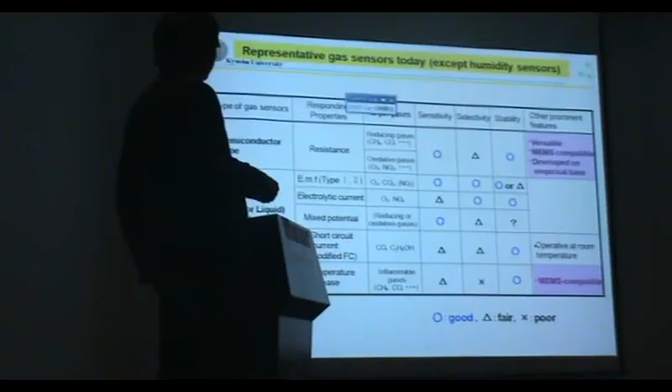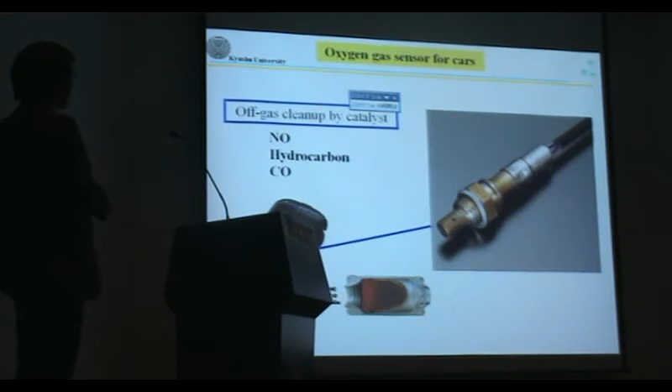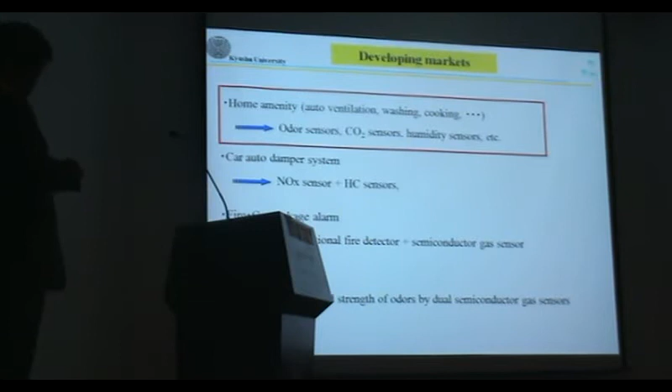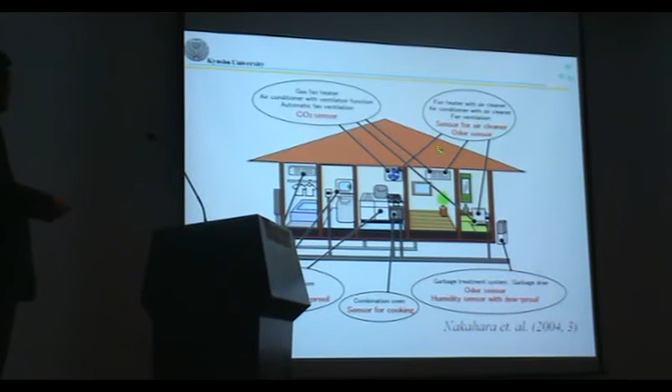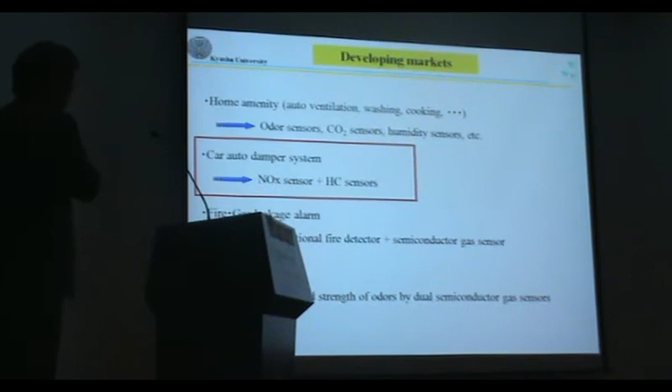So now we can find many gas sensors in the house: CO2 gas sensor, humidity sensor, and other kinds of gas sensor, odor sensor, and dew point sensor. Okay. And in the recent 10 years, European companies use a special kind of sensor. It was the auto damper system sensor.

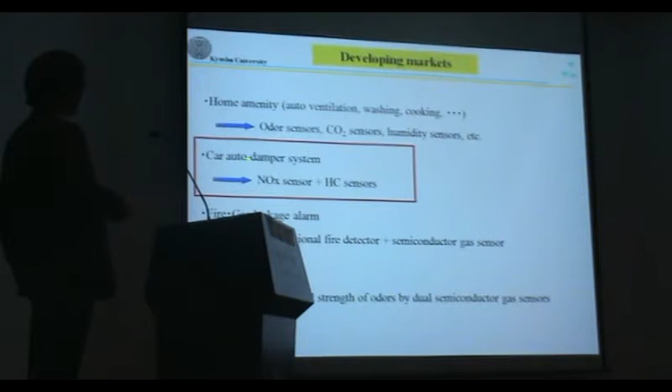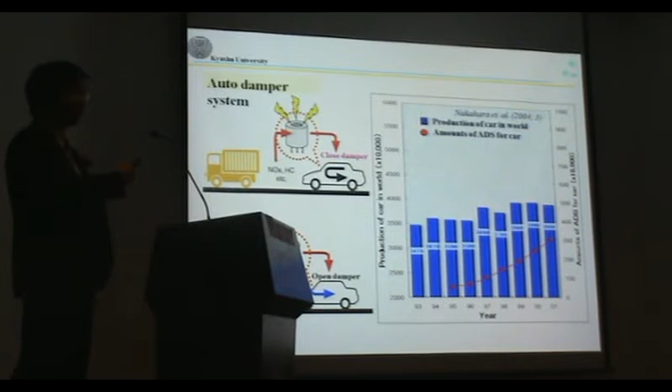So maybe Asian countries didn't use this kind of sensor, because our cars include the air conditioner system, but in Europe, the outside is very clean compared with the Asian areas. So they want to introduce fresh air from outside. This sensor is very useful to control the temperature. That's the condition controlled by this sensor.

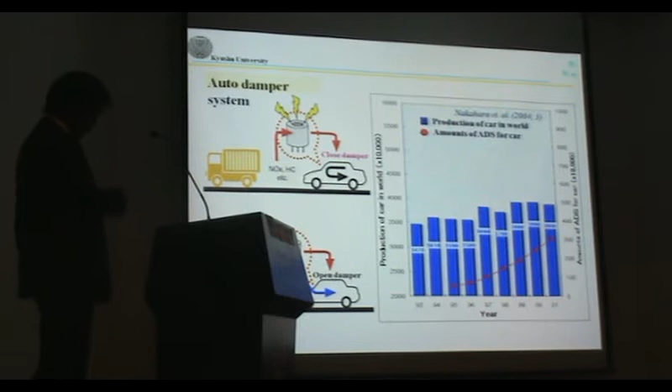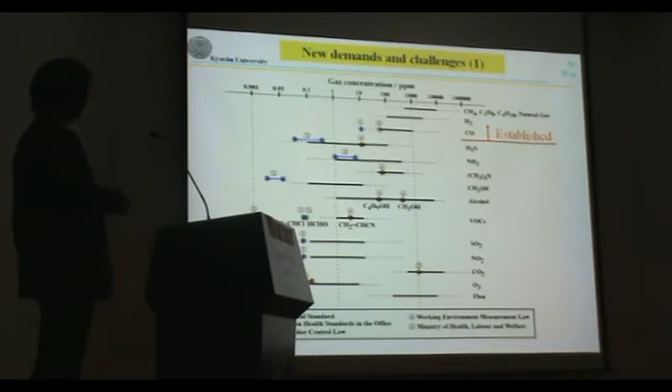In the case of medical use, many sensors were proposed, but there are many problems. I think maybe the CO2 gas sensor is one of the candidates to use in the medical field. But the other gas sensors are on the way to development. And also, the medical doctor requires many gas sensors, for example, methane, acetone, isoprene, sulfur-containing compounds, and so on.

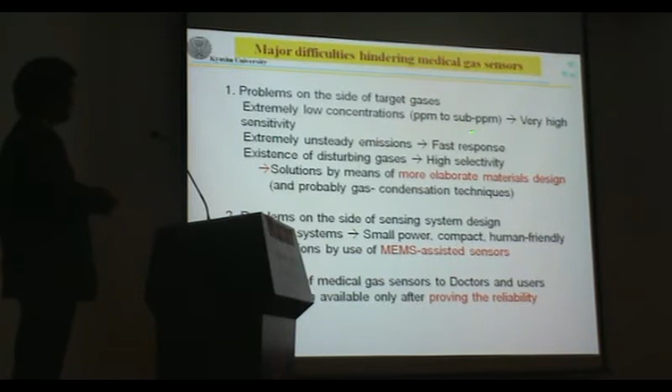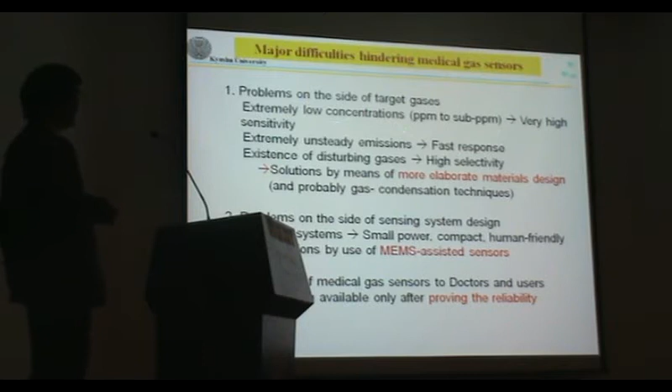But in medical gas sensors, there are many problems. One big problem is the gas concentration is quite low. Sometimes the doctor says the gas range is ppm, but in other cases the concentration is down to sub-ppb or ppb. So gas concentration detection is very severe for medical use. And fast response and high selectivity are also required.

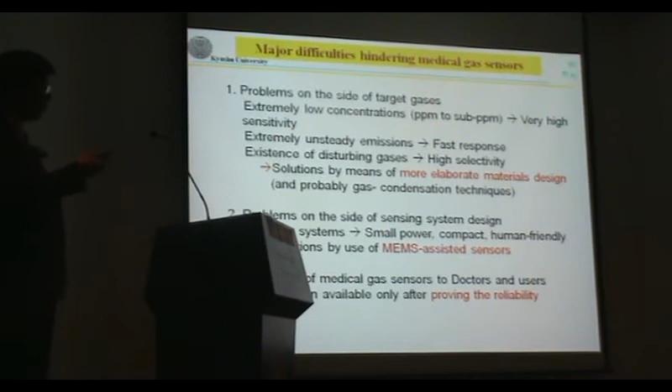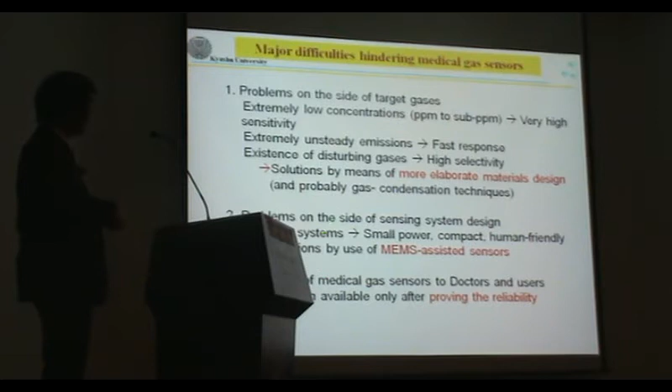And the second problem is portability. The medical doctor wants to use it in the operating room or the hospital room and so on. So the system should be downsized, for example, like a mobile phone. And reliability is also required. Today, I focus on two points: high sensitivity and selectivity, and the portable size.

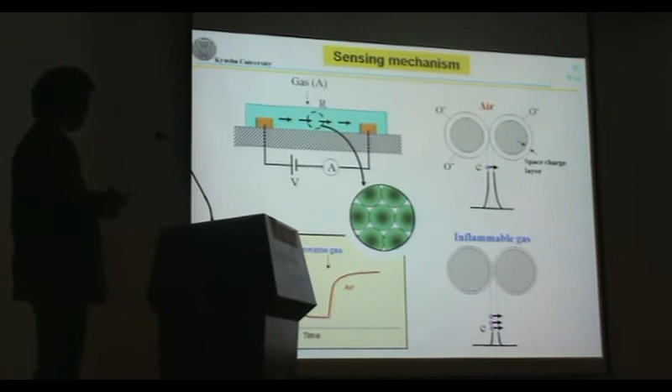Okay, I'm going to show the gas sensor principle mechanism. The semiconductor gas sensor consists of metal oxide powder. We deposit that powder on an alumina substrate with a gold electrode here. This film consists of these ceramic particles. The oxygen molecules in air adsorb on this particle like this. The metal oxide is a semiconductor material and operated at high temperature. The oxygen molecule adsorbs on the surface as O minus.

So electrons move to the oxygen. Finally, at the surface the resistivity is quite high, very high resistivity. When flammable gas approaches the surface, this gas reacts with the adsorbed oxygen. Finally, the electrons return back to the bulk, so surface resistivity quickly goes down. We can obtain the sensor signal shown here.

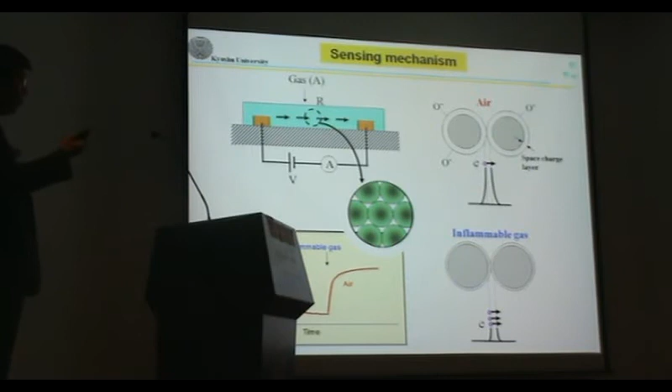So high resistivity in air. In flammable gas, the resistivity quickly goes down, and out of flammable gas, the resistivity returns back to the previous level. We can detect flammable gas by using this sensing mechanism. Okay. To obtain a high performance sensor, three important key factors are needed.

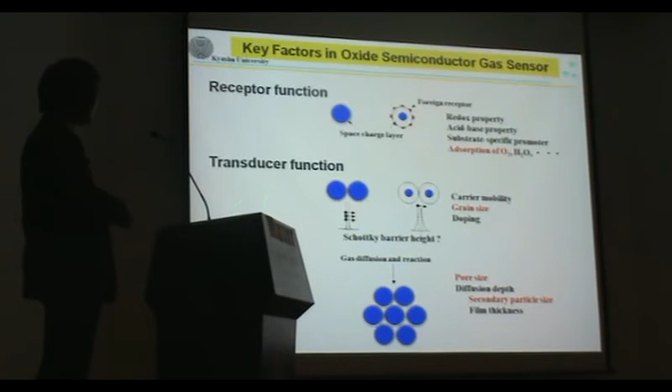So I propose these three functions together. The first one is the receptor function. We introduce a receptor on the ceramic particle, so these particles catch the gas molecule selectively.

For example, we loaded copper oxide. This is a P-type semiconductor, and this is tin dioxide, an N-type semiconductor. So the interface forms a P-N junction, but when these particles contact

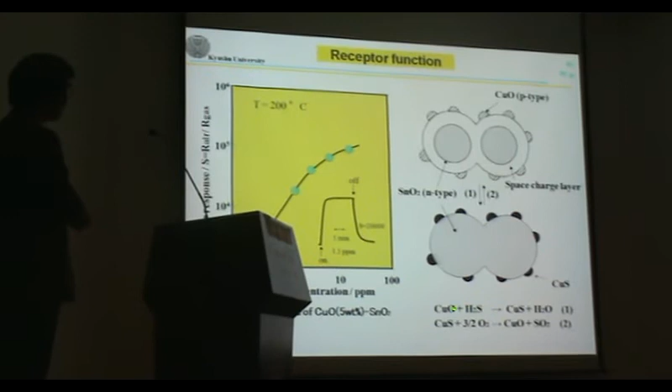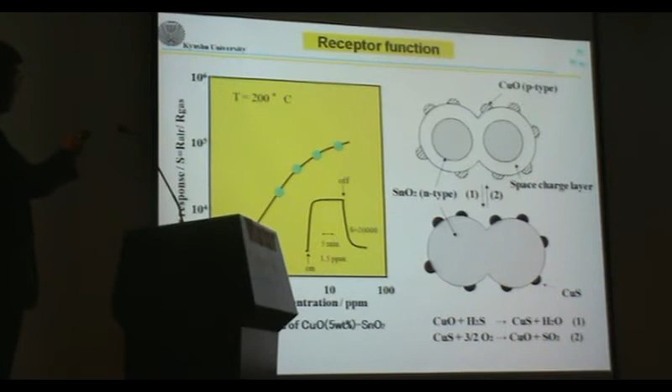hydrogen sulfide, this gas reacts with the copper oxide. Copper oxide changes to copper sulfide. This is a semiconductor, but this is a metal. So the PN junction vanishes and changes to a metal-semiconductor junction. Finally, the resistivity drastically changes like this. So this sensor material can detect very low concentrations, maybe 1 ppm.

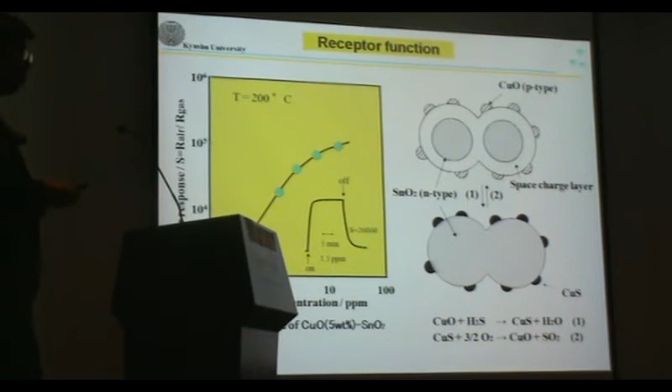The second, grain size control is very important, and the sensing film is used as a whole body. So the sensing film needs the utility factor. The gas molecule must diffuse deep inside. Finally, this sensing film shows very high sensitivity.

So I propose a high performance gas sensor by integrating the three factors. The nanoparticle should be controlled. Doping means the semiconductor should be controlled in the donor density, and the nano-size receptor also contacts this particle, maybe 10 or 20 nanometers in diameter.

These particles agglomerate like a cluster, and then the cluster should be formed like this. So large size gas molecules can diffuse deep inside and react on every part. Finally, for all of the particles, the resistivity changes drastically.

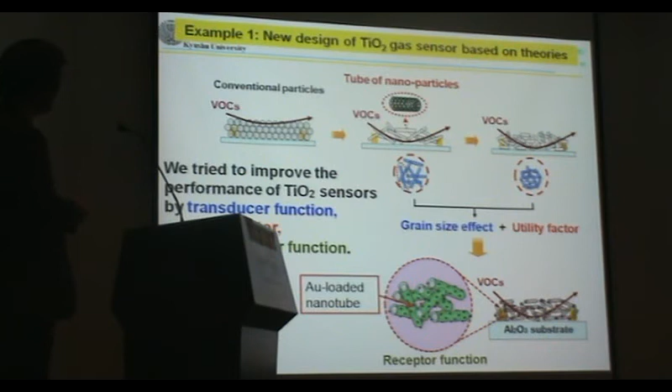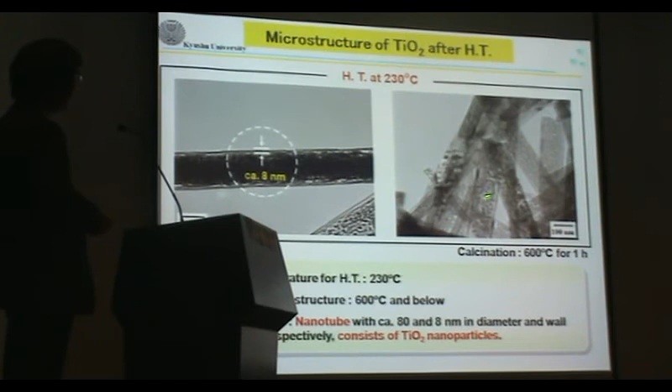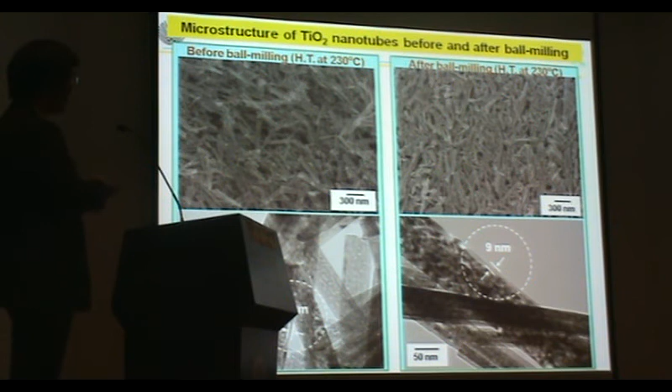We prepared the TiO2 nanotube by using hydrothermal treatment. Finally, we can obtain the nanotube. The nanotube has a wall and an inside space; the wall thickness is 8 nanometers. And this nanotube consists of nanoparticles like this. We deposited the nanotube on the alumina substrate by so-called ball-milling, so that the size was kept at a constant value.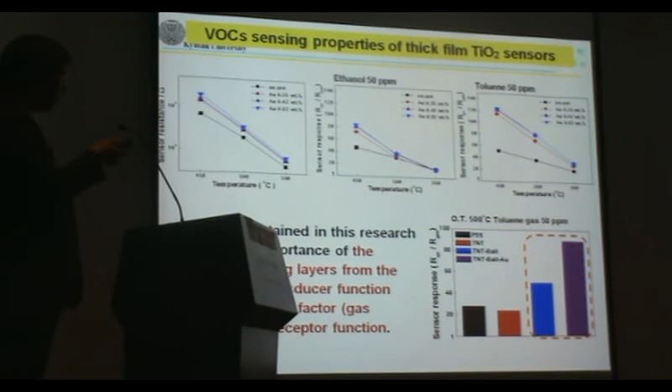So we can modify the sensitivity and the selectivity by controlling the receptor function, transducer function and the utility factor. This sensor can detect propofol also. Propofol is a medicine, an anesthetic. This propofol was used by Michael Jackson before dying.

And the propofol size is larger than toluene. Usually, general semiconductor gas sensors couldn't detect this kind of gas because the molecular size is too large. This sensor can detect propofol like this. Maybe this sensor is more sensitive to it than toluene.

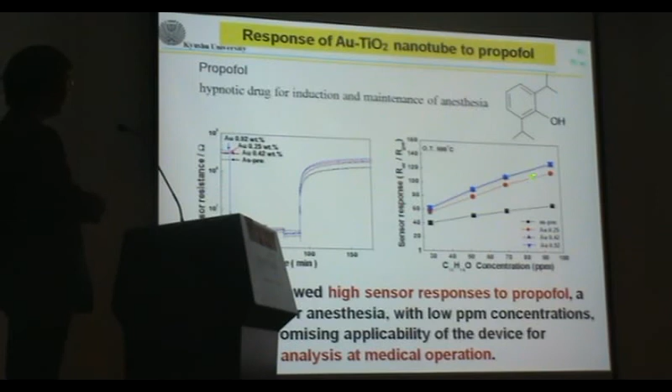This MEMS has very interesting advantages. One is very quick response, within a second. This quick response is very useful for the medical field.

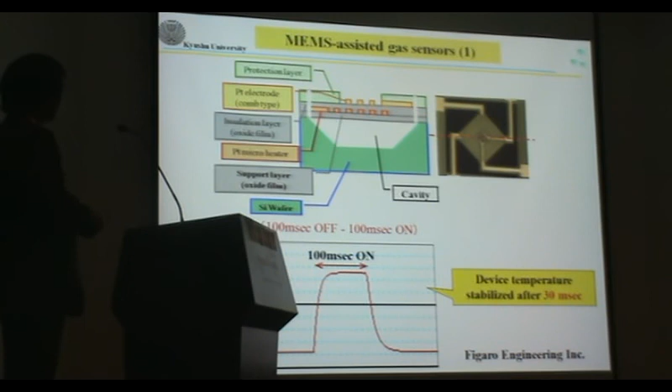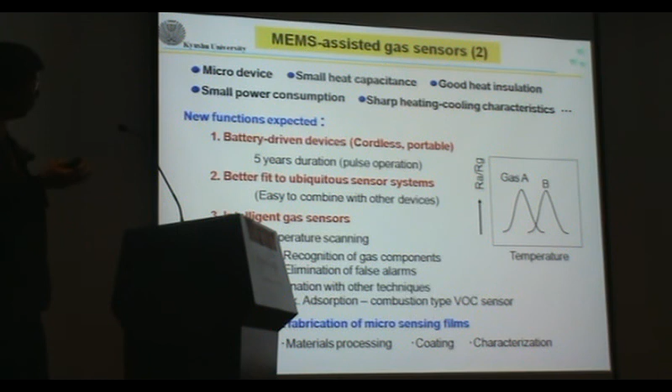And MEMS-assisted gas sensors have very interesting properties for other applications. One is battery-driven devices; such a MEMS device can work for 5 years using lithium-ion batteries. So the MEMS chip can be introduced into mobile phones and very small portable devices, and we can integrate MEMS devices in the portable system. I think this advantage is available for the medical field.

I would like to conclude my presentation. For the semiconductor gas sensor in the medical field, we must give the solution from two points. One is the sensor material should be optimized. And the second, a small chip like the MEMS chip is very useful in the medical field.

But as the base substrate is changed to a small size, we must arrange the sensor material, because the coating system and the preparation system are quite different from the present system.

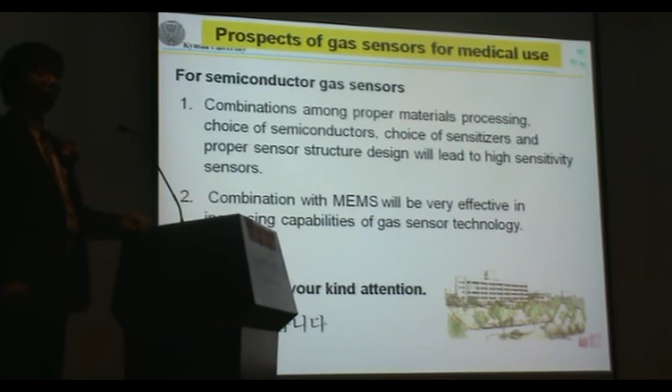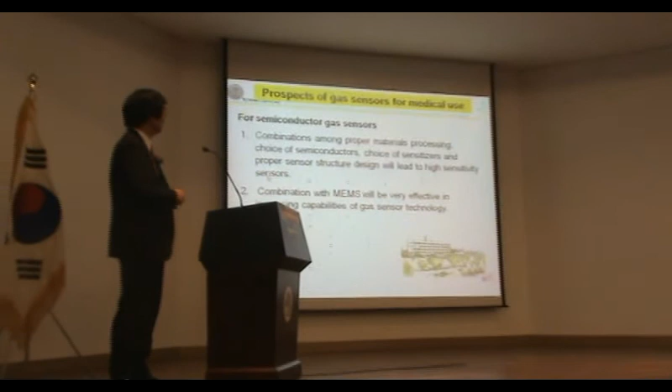You mentioned propofol detection using gas sensors. Have you done that experiment with real breath? I mean,